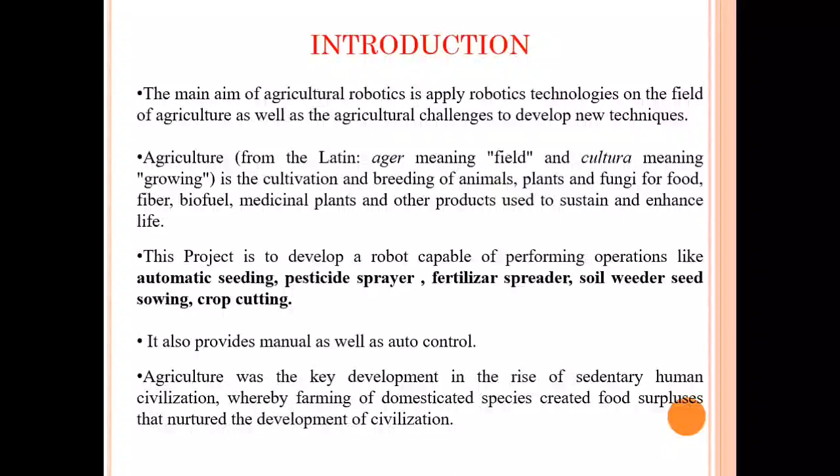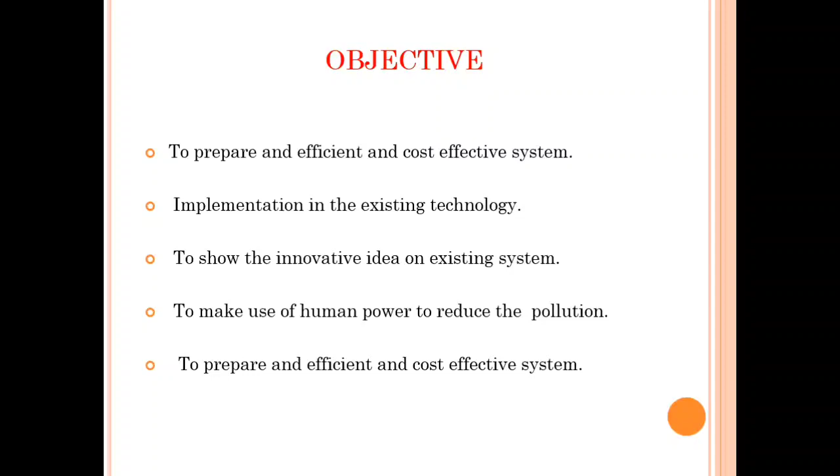Our objective is to prepare an efficient and cost-effective system, as costlier machinery is available in the market, to implement existing technology and show innovative ideas on the existing system, to make use of human power to reduce pollution. As we said, preparing an efficient and cost-effective system is our primary objective.

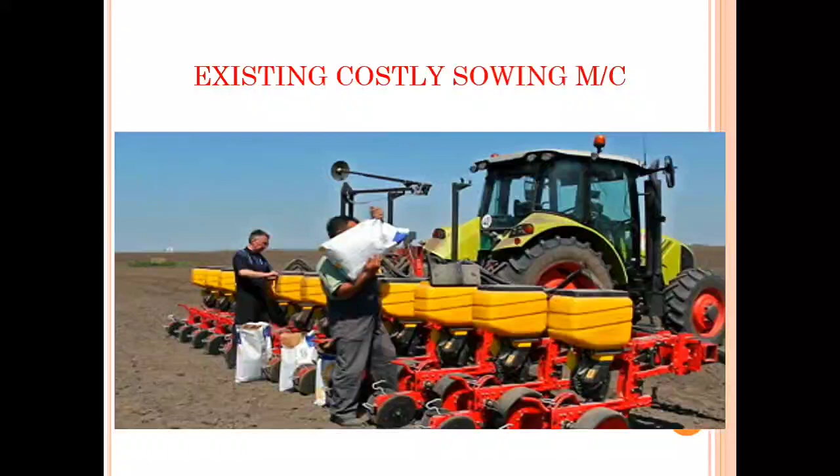These are some costly agriculture machineries which are not affordable by middle class or poor farmers. Traditional farmers spread fertilizer manually. This is one of the costlier machineries used for weeding operation by tractor.

Components used in the project are: we use a couple of DC motors for operations like DC gear motor with runner wheel, DC gear motor with seed dropping cylinder, DC pump for pesticide sprayer, weeder ferros, fertilizer spreader, solar panel and battery, and chassis.

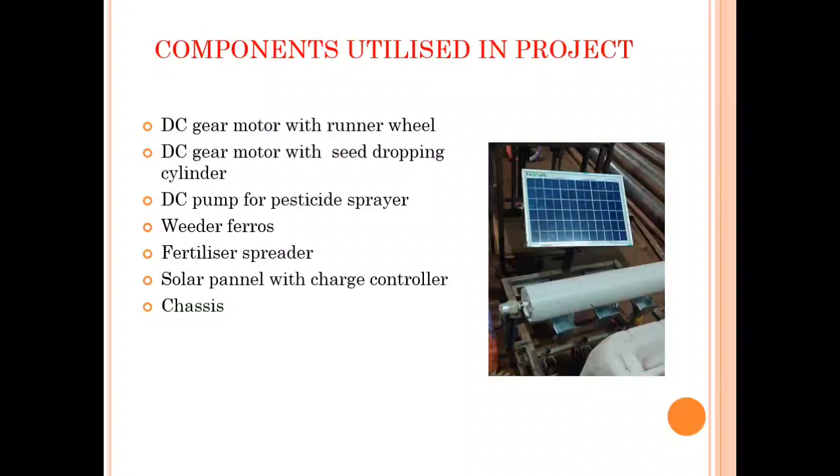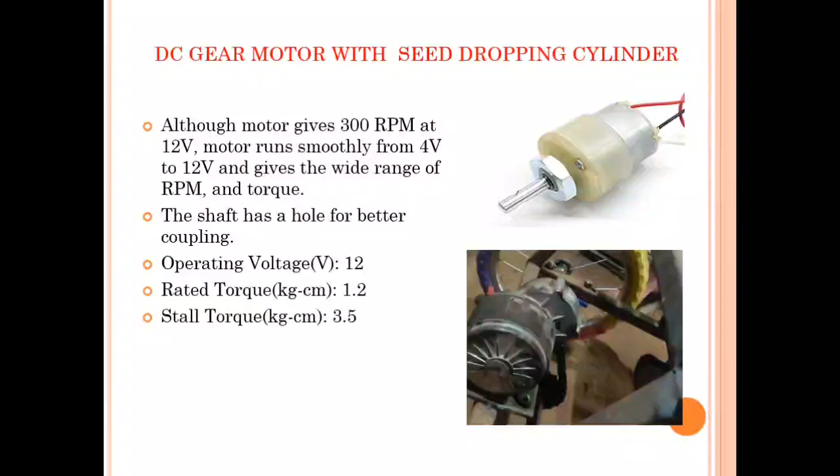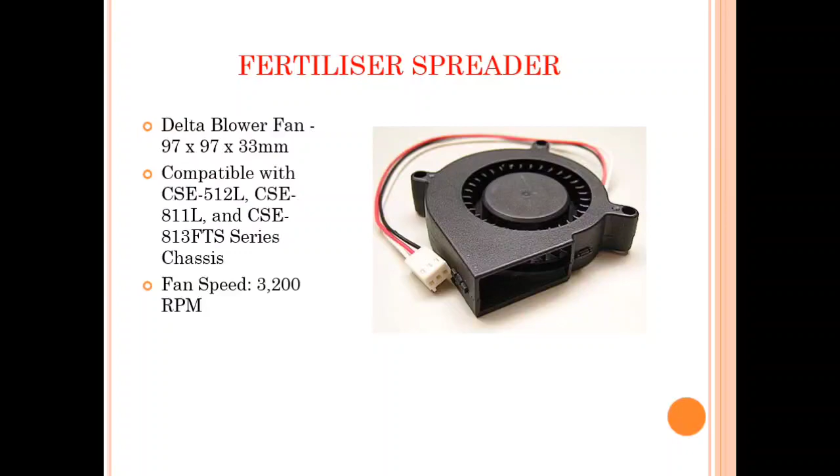This is a quick overview of some components. This is the DC gear motor with runner wheel. This is the DC gear motor with seed dropping cylinder. This is the DC pump for pesticide sprayer. This is the fertilizer spreader, and a delta blower fan, which speeds at 3200.

Working of the system: Sowing is the most important process in farming. It is a very tiring and time-consuming process that takes a lot of human effort. Here we design a robot and fabricate a fully automatic seed sowing robot that runs off a DC motor. There are four motors for running it in the desired direction.

We use a horizontal cylinder for pouring seeds with a hopper attached to it. The robot consists of a funnel-like arrangement to pour seed into the lower containers. The front of the robot is fitted with a bent plate, which drags the soil to make a slot, and in that slot we put our seeds. This is the general working, and the robot runs on solar energy.

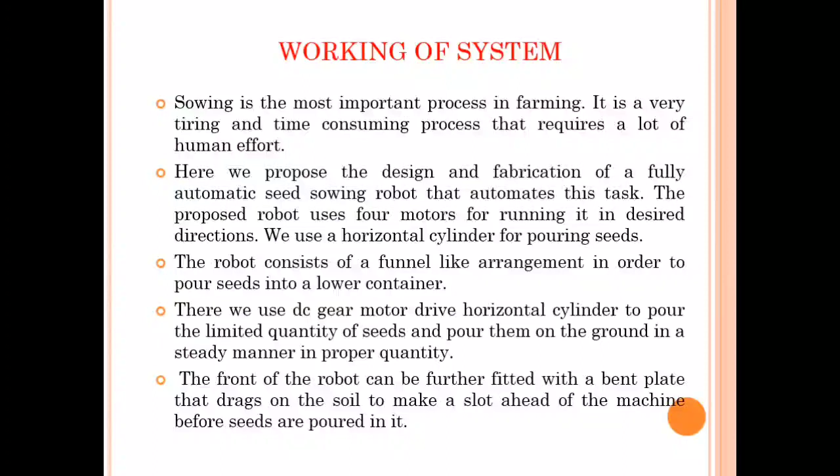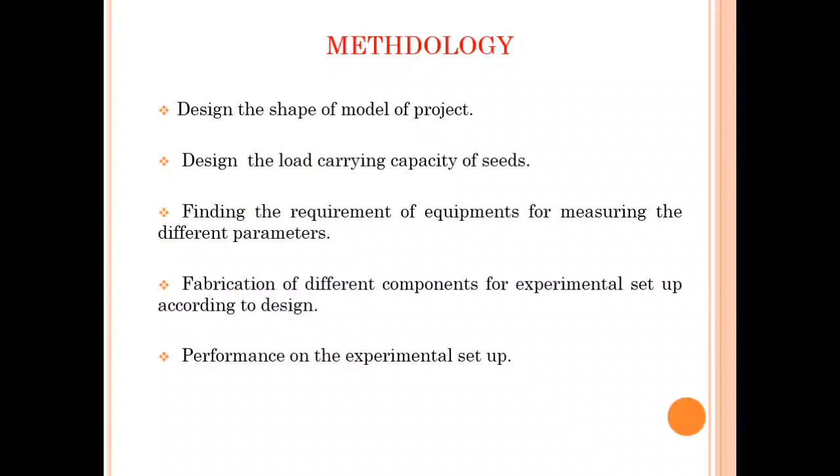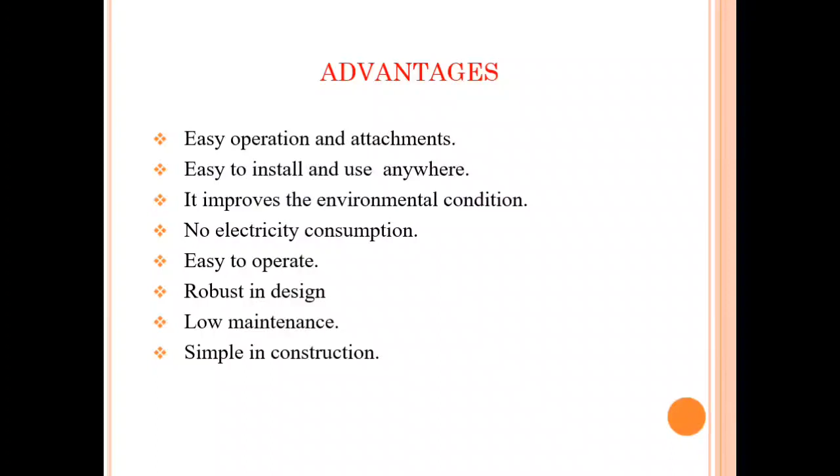Advantages: easy operations and attachments, as we attach so many attachments to cut plants, to sow, fertilizer spreader, etc. Easy to install and use everywhere. It improves environmental conditions. No electricity consumption as it runs on solar energy. Easy to operate. Robust and compact design. Low maintenance - the only maintenance is to maintain our battery. Simple in construction so a simple farmer can use this.